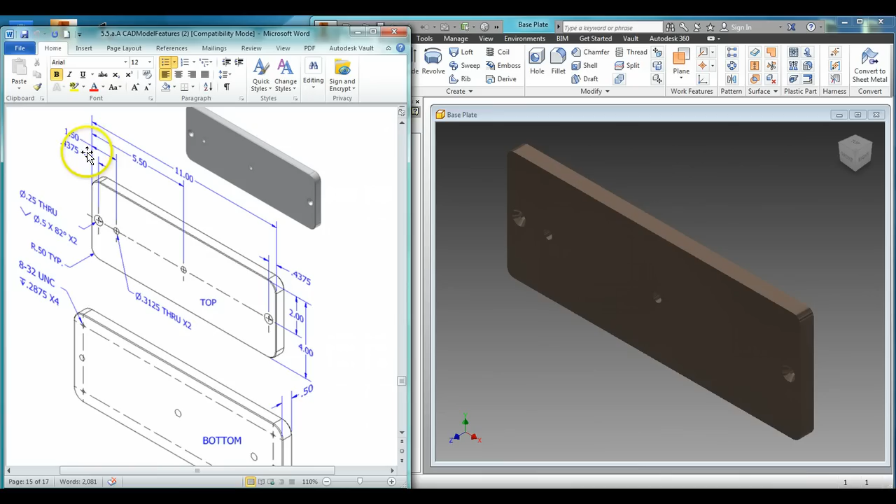So as I build this base plate, I'm going to be taking you through how to actually read these schematics. So let's go ahead and get started on a new part, just like we do with absolutely everything. We're going to create a 2D sketch, and let's go to the schematics. We need to find out the overall length right here. So when we look at the far right and the far left, we can follow up this leader line and see that this is 11 inches long.

We need to look at the far right to figure out the overall width. We can see that it's 4 inches long. So this piece is going to start out as a rectangle, 11 inches long and 4 inches wide. So we've got that done. Now the next thing that you'll see in here is it's not just a square corner rectangle like what we're used to. These corners are actually rounded over.

Now we need to find what the radius is. So we're going to look at every single one, and this one has a dimension pointing at it, and it says R.50 TYP. That means that these radiuses are typically 0.5 of an inch. So that's what we're going to do. We're going to radius these at 0.5 of an inch. Now the way that I like to do that is just with some geometry.

We're going to put in 4 points at each corner of the rectangle that we're doing right here. Now that we have 4 points in there, I'm going to dimension these so it's 0.25 away from each side. Now the reason that I'm doing that, 0.25, is because I can now take a circle, put it at that point, and it is 0.5, which is the diameter that I have right there, and hit enter. Now I've got a circle right there.

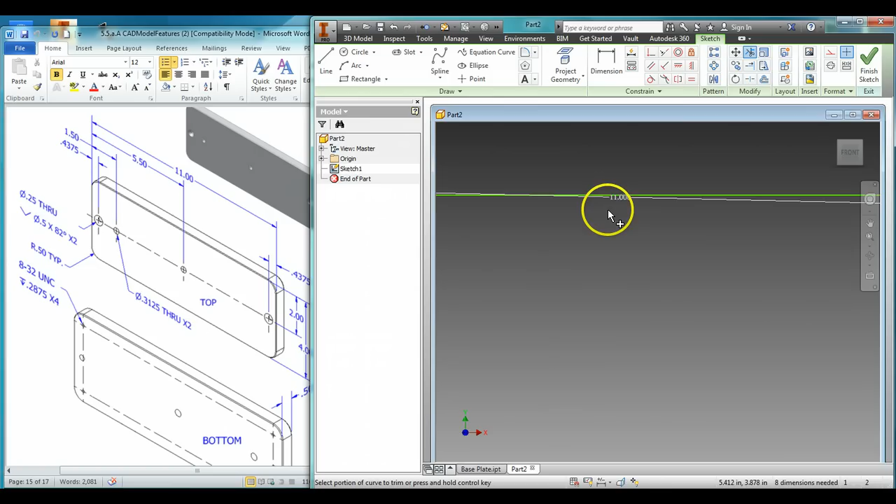From here, all I have to do is actually trim this. Trim the outside corners. Trim the circle portion. You can see I've got a radius piece. Now the one thing that this does confuse is the computer with sort of our dimensions right here. You can see my 11-inch line is sort of angled. So all I'm going to do is just delete that dimension. It's still 11 inches long, but now I have that.

What I'm going to do now is just the same operation for my other 3 corners, but I'm going to pause the video for a second so you don't have to watch me do that. Okay, so I paused the video for a few minutes, and you can see now I have put a circle and trimmed every single corner. So much like in this design right here, where every single corner is radiused, so is the design that I have right here. Now that we have our basic shape finished, we have to extrude this out.

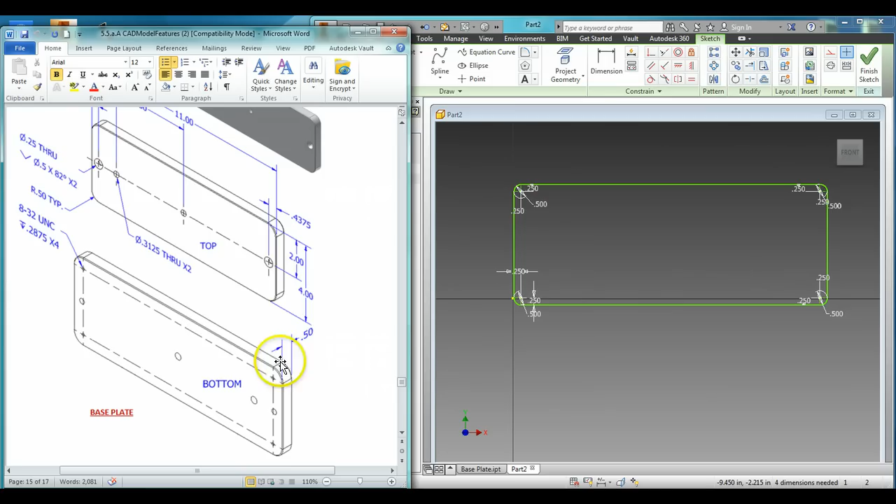So let's look at our design to find the thickness of the object, and we see that right here, which is 0.5 of an inch. So that's what we're going to do here. We are going to extrude it out 0.5 of an inch. And there we have it. It looks remarkably similar so far.

Now we have to start doing some of the geometry in the holes and everything. So if you look at this, there's 2 sides to this. There is a front side with 1, 2, 3, 4 holes, and there's a back side with a differing hole pattern. What this is saying is on our front side, which is this, all of our holes are through holes.

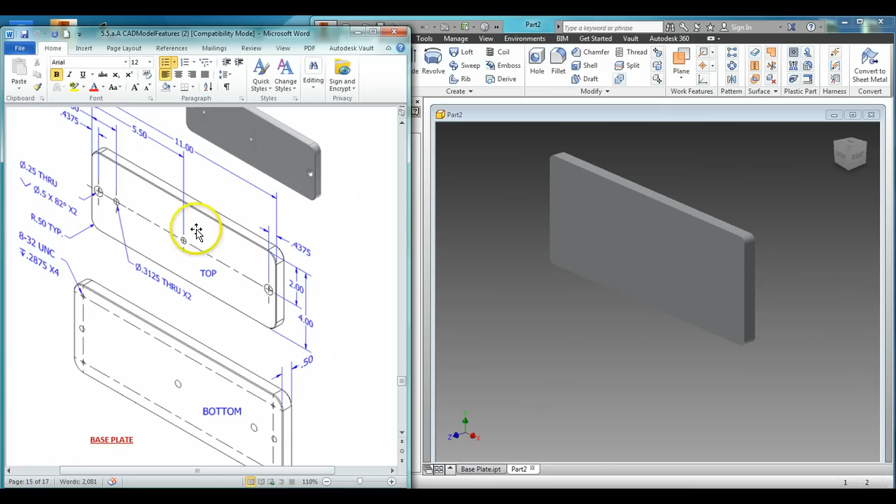You can see them correspond up with that. But on our bottom, there are some blind holes, or holes that do not go all the way through. Let's go ahead and start with our front side to actually do these holes. In order to do this, we're going to create a 2D sketch, and we are going to draw on the face of the object. Now you can see that all of these holes are located on a center line. You know that because it's dashed like a center line.

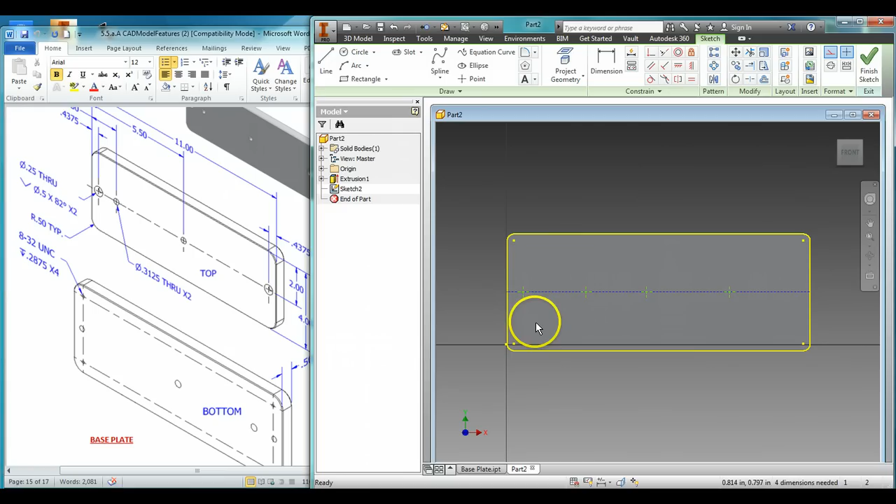So to make this a little bit easier on myself, I am going to use a construction line to actually draw right down the center, just like that. Now remember, a construction line is an imaginary line. It's not actually there. Now I'm going to locate 4 points. I do this because there are 4 differing holes right there. So 1, 2, 3, 4. And you can see that all 4 points are located along that construction line.

Starting from the far left, this closest point, when I look at our design, I need to find out where it's located, and look at this hole, follow the leader line up, and it's 0.4375 away from the edge. So that is what I'm going to do. Dimension this 0.4375 away from the edge. Now our second hole, follow it up and over, it's 1.5 away from the edge. So dimension that, and it is 1.5 away from the edge.

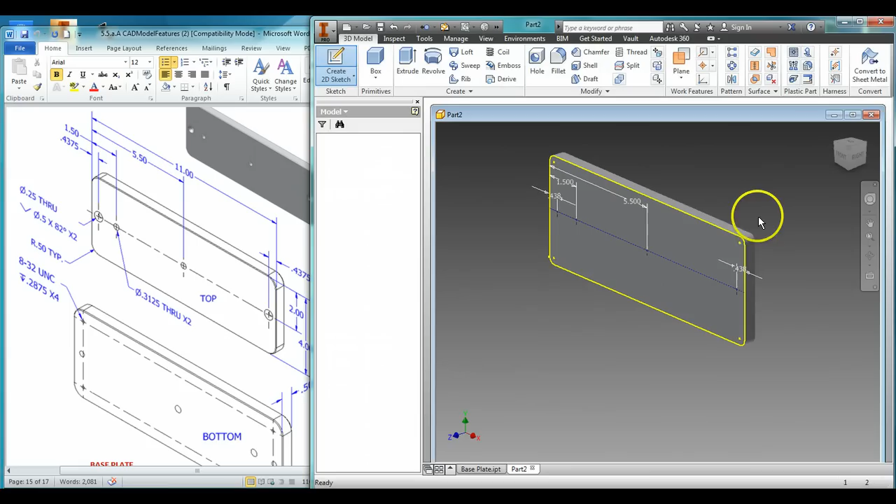Our third hole, follow it up and over, 5.5 away from the edge. So that's right in the middle. Now our fourth hole, we look at this, it is 0.4375 away from the right edge. So we have to dimension that on the other side. 0.4375. Okay, so we have our points in where we want to put our holes. Click Finish Sketch, and I am just going to change this to the front view because now it's time to actually put in the hole.

Oops. Come on. Sorry about that. My computer is freezing up a little bit on me. Okay, so I had a bit of computer problems right there, so I just paused it for a second.

But what I did was deselect these 2 holes by clicking the Shift key and clicking the point. And you can see they're no longer selected. They are blue. And the hole on the far left and the far right are still selected. Now looking at the hole on the far left and the far right on the design, we can see that this says 0.25 through with a V, which stands for a countersink. Diameter is 0.5, 82 degrees, and there's 2 of them. 1, 2. So looking at this, we are going to go to this, which is a countersink.

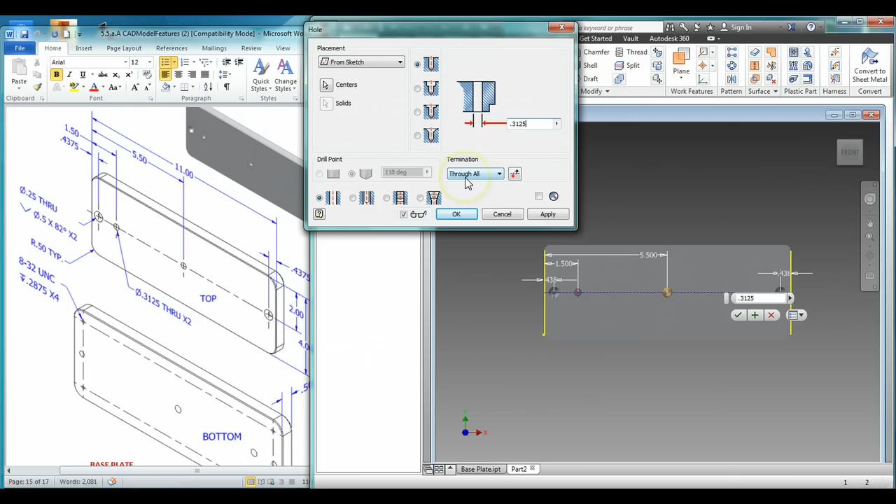And when we follow this down, it says the diameter is 0.3125. It's a through hole, and there's 2 of them. So click on that. We are going to just click through hole, which is a drilled hole, change the diameter to 0.3125. Termination is through all, and click OK. So now we have our other holes.

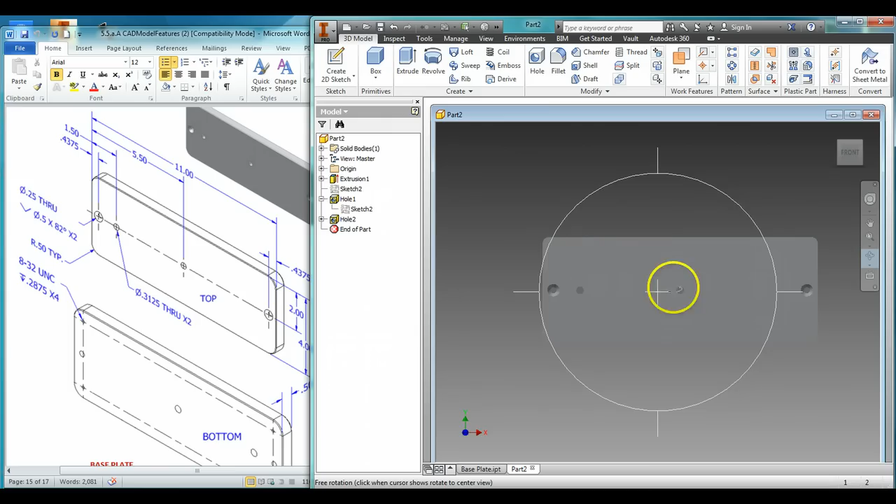You can see, however, that there are still visible dimensions and everything. The way that you get rid of this is to go to Sketch 2, right-click, and uncheck visibility. So now those are gone. When we rotate this, make sure our holes and everything are good, and you can see we have a through hole and we have a countersink hole.

Okay, so this is the pattern done on the front side. So when I click on front, this is what I see. There is also holes on the back side. So what I'm going to do is switch this over to the back right here. And I am going to create a 2D sketch on the back.

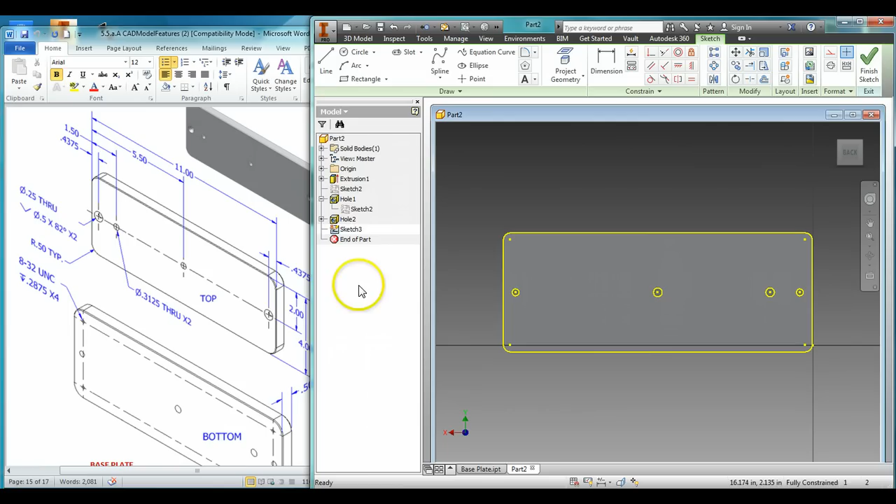The back is fairly easy when we actually look at the schematic for this. There are just 4 holes in the corner, and they are drilled and tapped holes. That says this. They go 0.2875 deep. There's 4 of them, 1, 2, 3, 4, and they use threads.

So what I'm going to do is put a point in here, and you can see the point with the dimensions at least correspond with the center point of this. So you have a 0.5 radius. You can see that the point corresponds, or the hole corresponds with the midpoint of that radius.

So what I'm going to do is put a point on each one of the center points of our geometry, and you can see the coincident constraint sort of popping in right there, which is a good thing. I've got the points put in, finish the sketch, and now we can actually put our holes in there.

We are going to click this right here, which talks about a tapped hole. And the tapped hole allows us to determine sort of everything about the holes in general. So what we want is to change some dimensions or change some defaults right here. If you notice, right here it says 8-32 UNC, which is a thread designation.

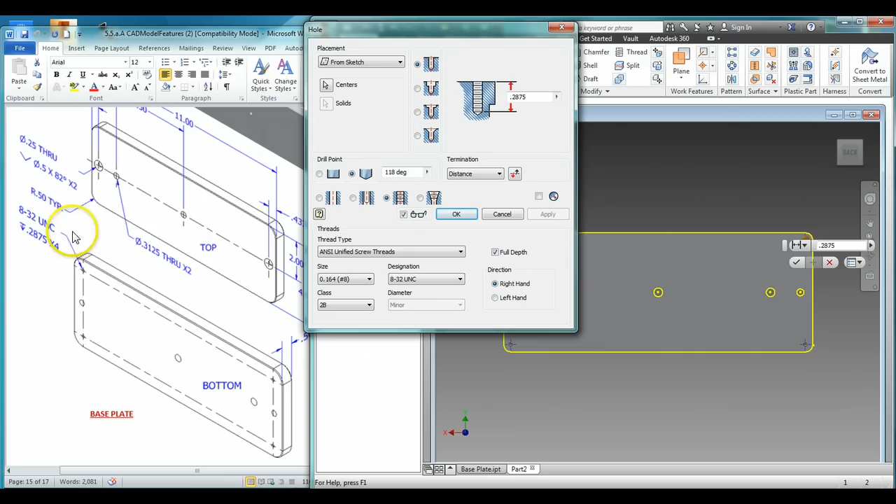So these settings are a little bit difficult. Let's just go through this. Through hole, click threads, found 0.164, which is 8-32 UNC, matches the same dimension right there. And all we're going to do is click OK.

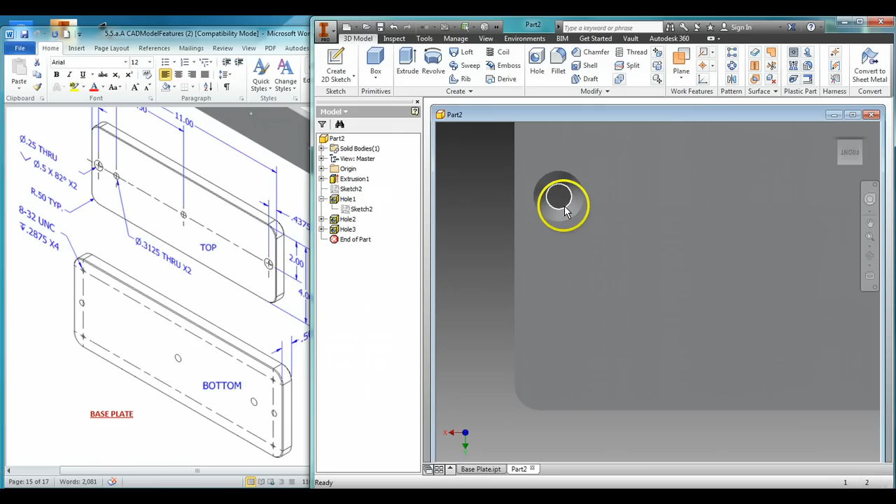And when we zoom in really, really close, we should be able to turn this, and you can see that the interior of the hole is threaded. And each one will be like that. So let's see, we're going to go back to the front here. We have countersunk hole, we have our through holes, and we have our threaded holes.

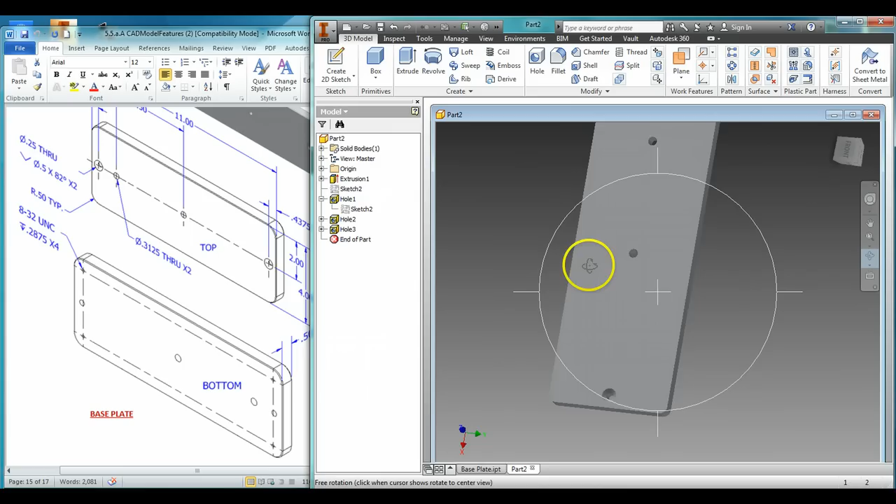So this is a fairly complicated part. It's time consuming. This is one of our longer videos. But realistically, in the real world, you're going to be making parts, designing parts like this all the time. Stop this video, rewind, and replay as many times as you need in order to get the geometry, and in order to understand how to actually read schematics and transfer those schematics over to Autodesk Inventor.